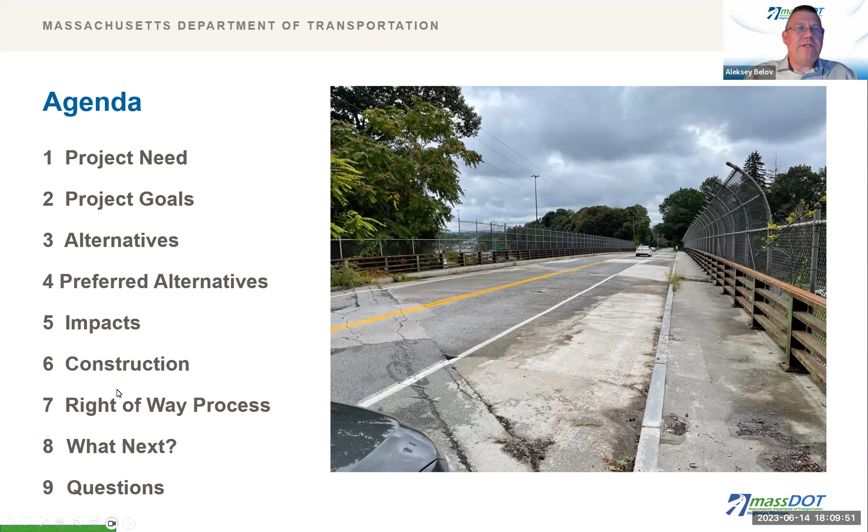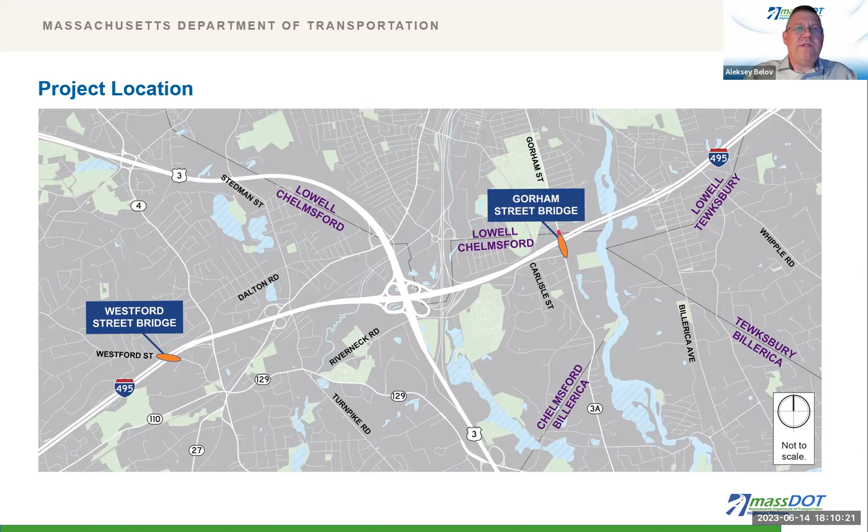As I indicated previously, these bridges will be replaced at the same time using the design-build method. Specifics about the design-build method will be provided later in the presentation.

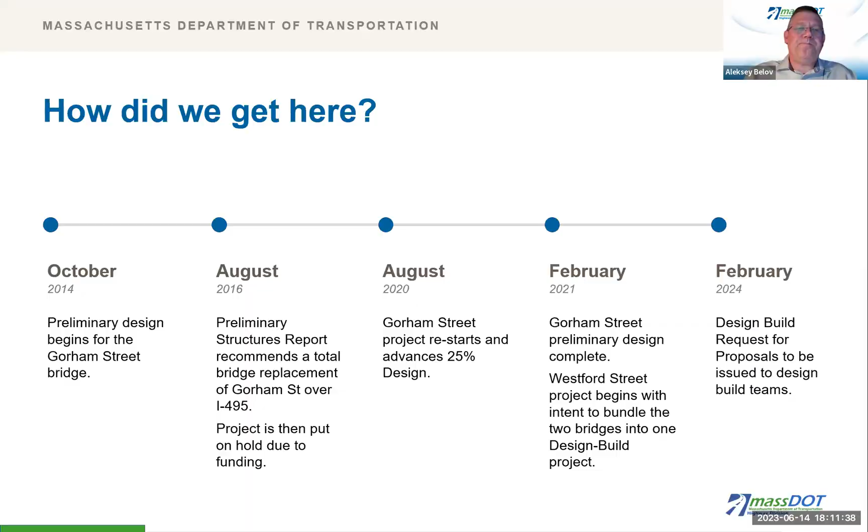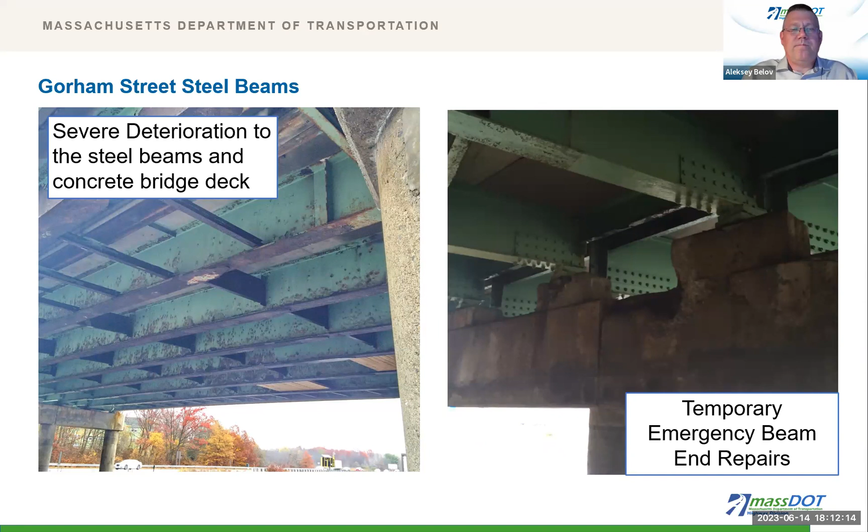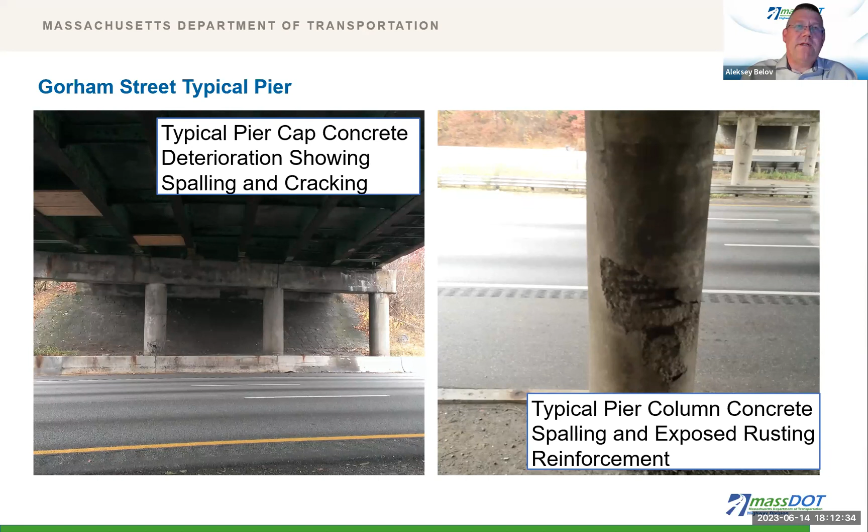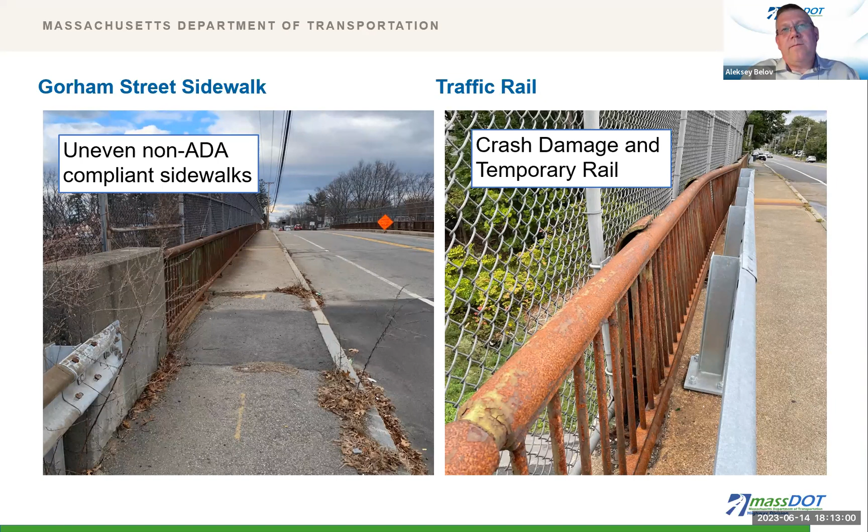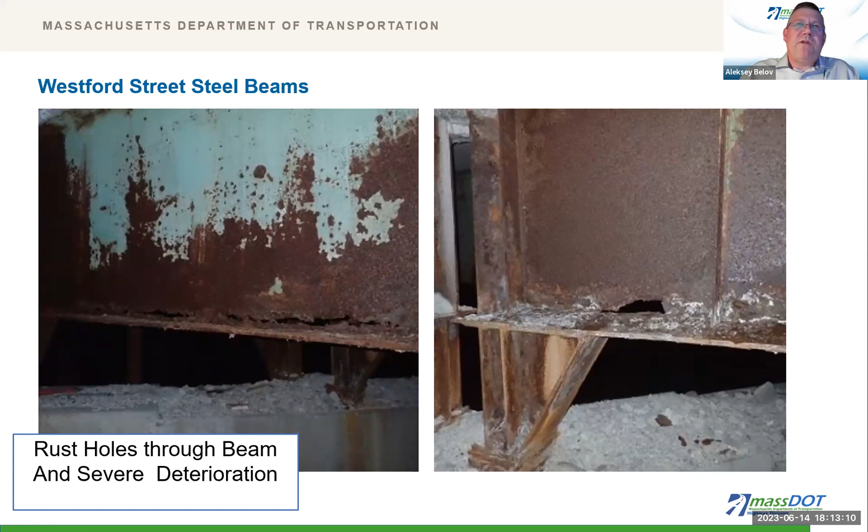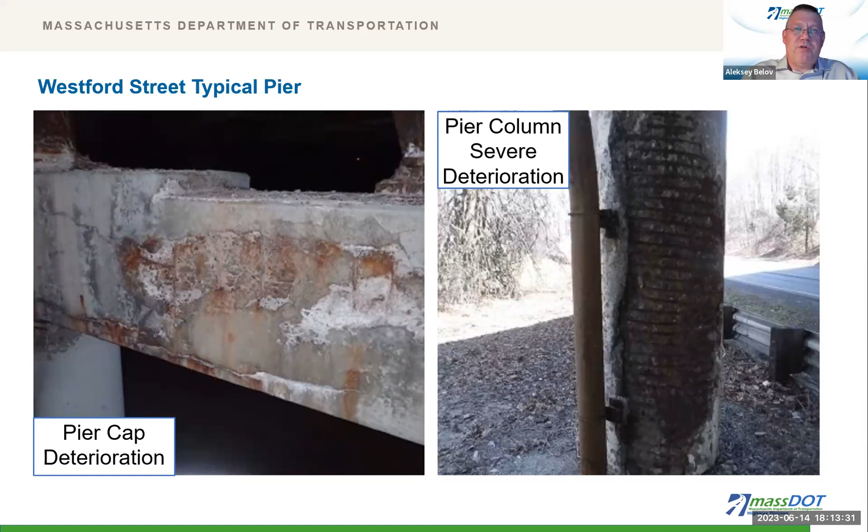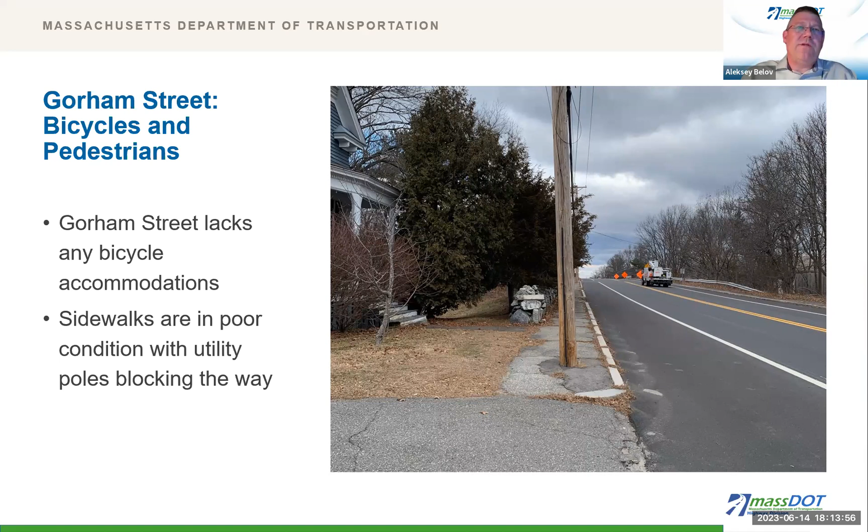Gorham Street has bicycles and pedestrians but lacks any bicycle accommodations. There is a wide pavement with wide lanes and shoulders, which lends itself to high vehicle speeds. The sidewalks leading to the bridge are in poor condition, with utility poles blocking the path in several locations.

Westford Street has similar issues. There are no bicycle accommodations on the roadway. There is only one sidewalk over the bridge, and it ends on either side without any accessible curb ramps. The other side only has a safety curb, which is like a very narrow sidewalk not meant for pedestrian access.

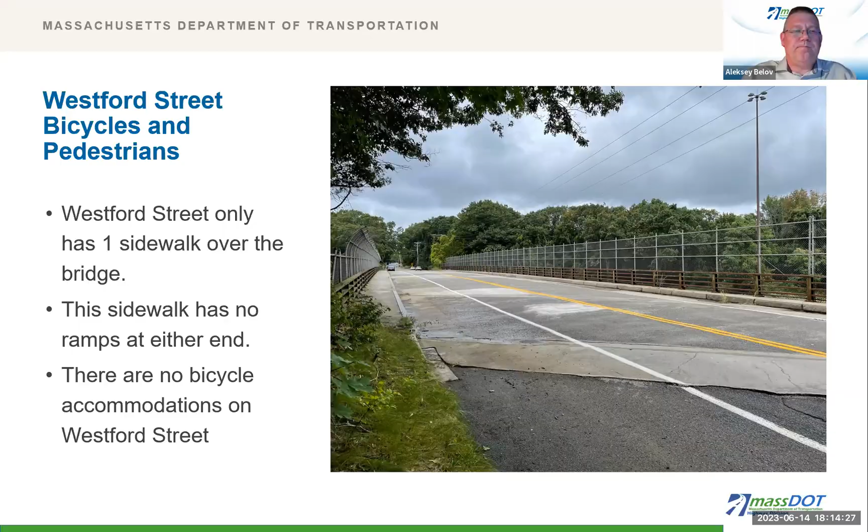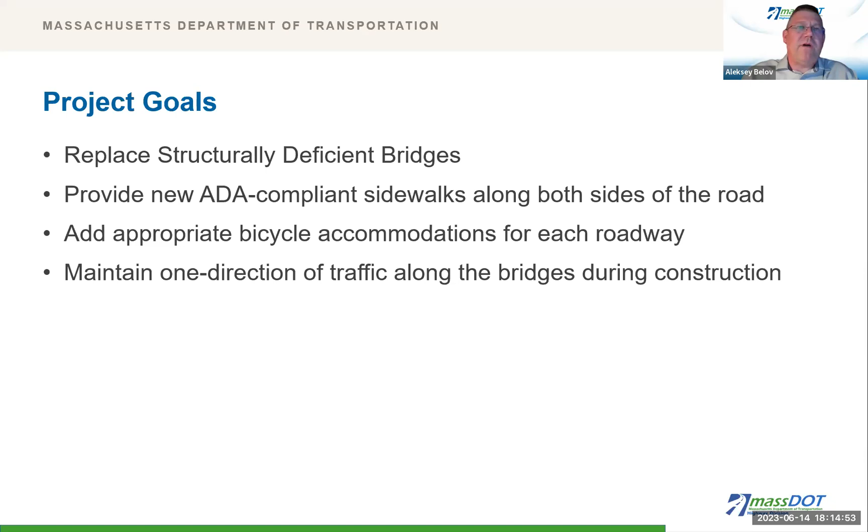What do we want to accomplish? Project goals are the following: replace the structurally deficient bridges, provide new ADA compliant sidewalks along both sides of the roadways, add appropriate bicycle accommodations for each roadway, and maintain one direction of traffic along the bridges during construction.

What alternatives were considered? The following alternatives were considered for both bridges: bridge deck replacement, superstructure replacement, and full bridge replacement. Full bridge replacement was the selected alternative.

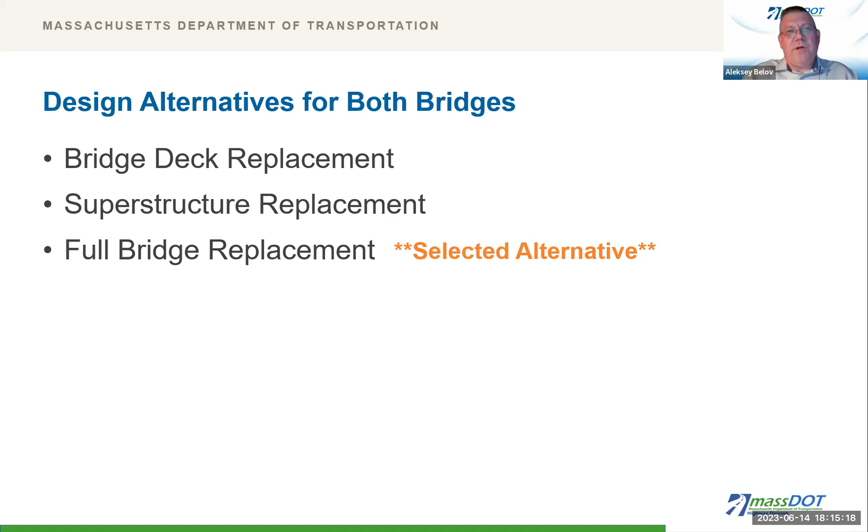What is in the preferred alternative? This is the plan view of the proposed design for Gorham Street, showing the southern project limits which extends just south of Riverneck Road. With the wide pavement width that exists today, we were able to propose a design that includes narrower travel lanes, 11-foot wide, and add buffered bike lanes.

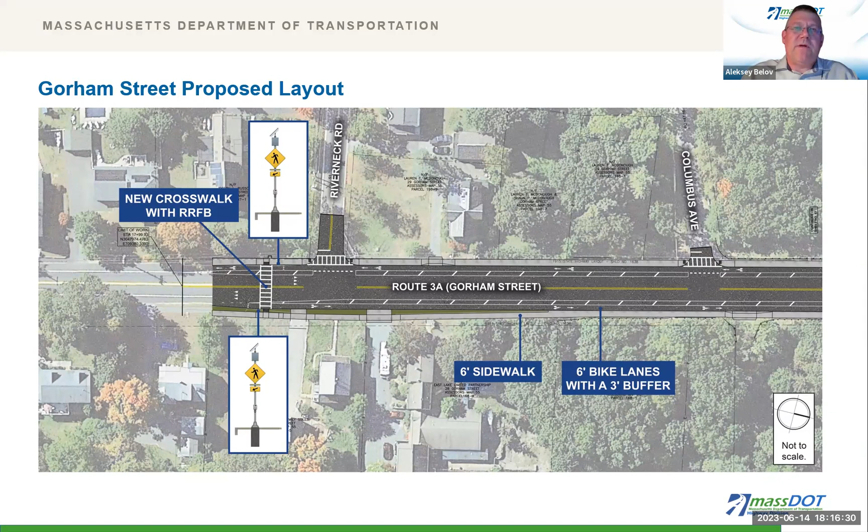These are 6-foot bike lanes with a 3-foot painted buffer. This will create a safer space for bicyclists traveling through the project limits. The sidewalks on both sides of the roadway will be reconstructed to new 6-foot sidewalks, and a new crosswalk is being proposed just south of Riverneck Road. This crossing will have a rapid rectangular flashing beacon to improve safety, and is being proposed here because there is a bus stop in this location.

This slide shows the rest of the project limits to the north, including the roadway over the bridge with the project extended to the Chelmsford Lowell line. The same cross-section is proposed for the entire project limits.

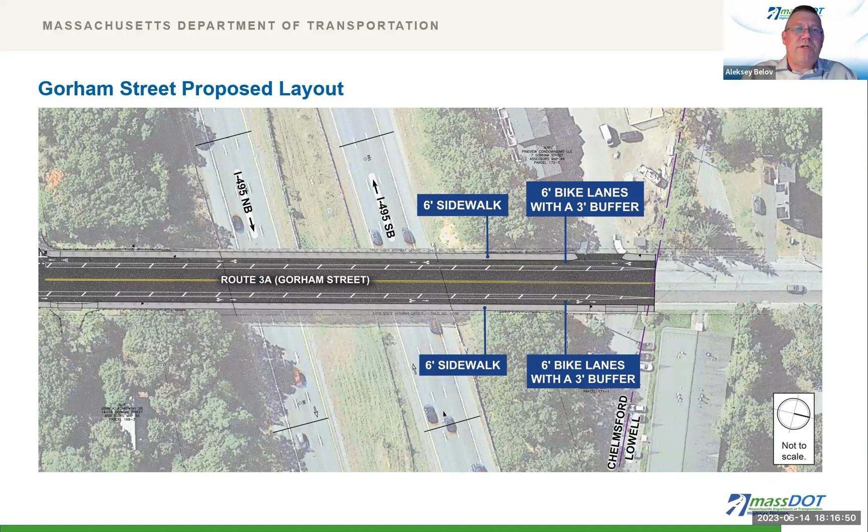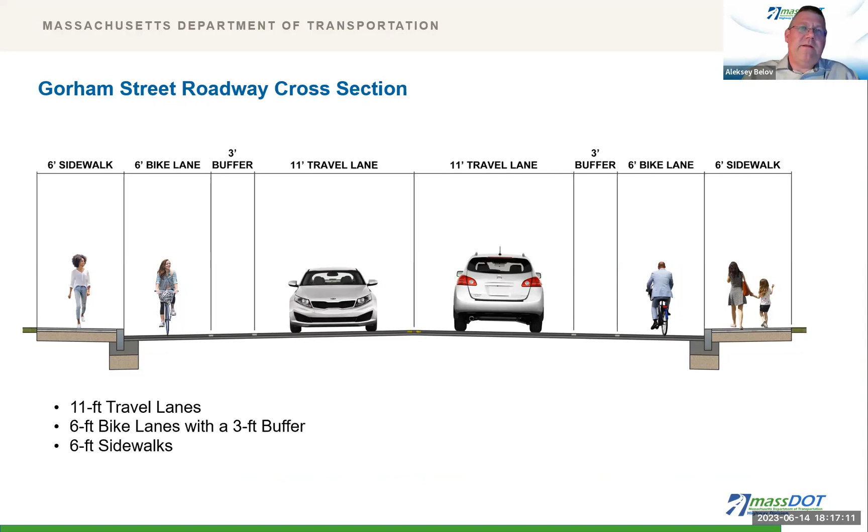This is a cross-section view of the proposed design for Gorham Street. You can see two 11-foot travel lanes, two 3-foot buffers, 6-foot bike lanes on each side, and 6-foot sidewalks on each side of the roadway.

There will be 6-foot sidewalks on both sides of the bridge with ADA accessible curb ramps. Another reason there are no buffered bike lanes proposed on Westford Street is because the project limits are not in the area considered to have a high potential for everyday biking, as determined by MassDOT's 2019 statewide bike plan.

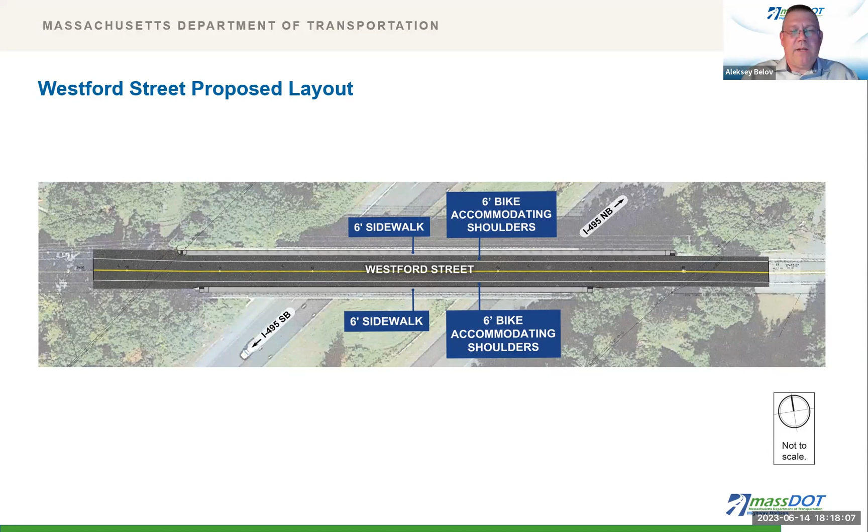This shows the proposed roadway cross-section for Westford Street. You can see two 11-foot travel lanes, two 6-foot shoulders, and two 6-foot sidewalks on either side of the roadway.

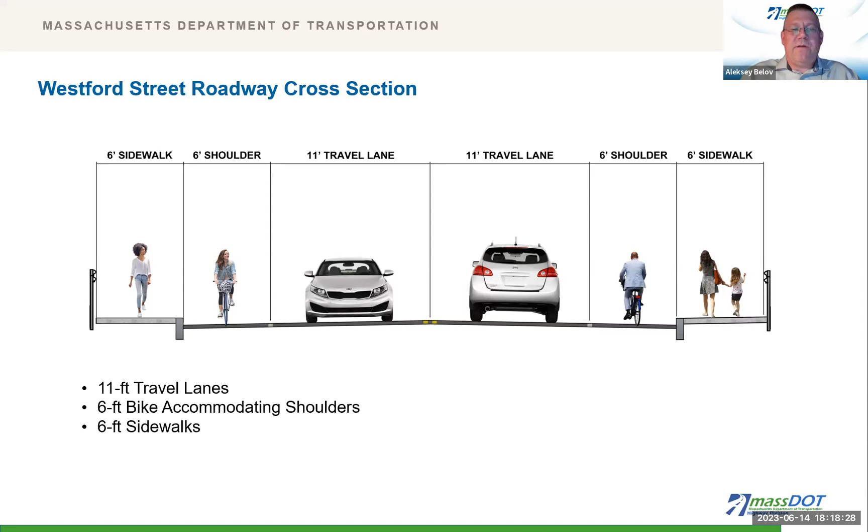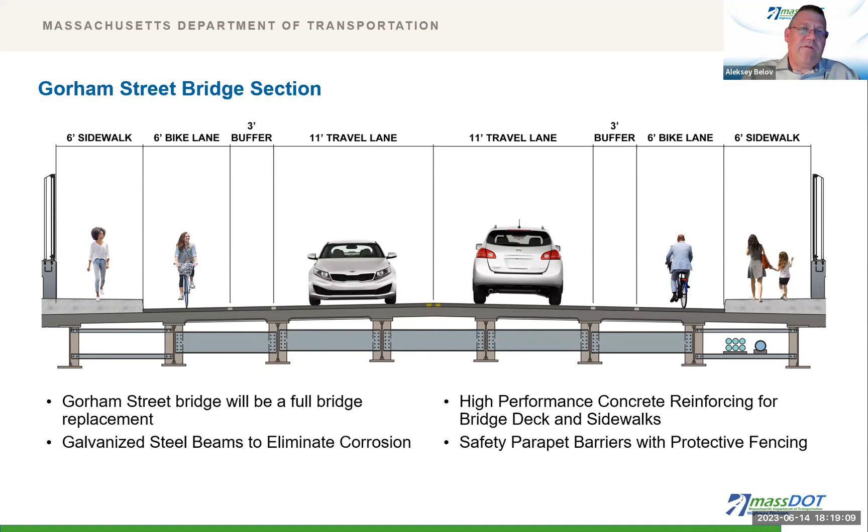Gorham Street Bridge will be a full bridge replacement with galvanized steel beams used to prevent corrosion, high-performance reinforced concrete for the bridge deck and sidewalks to increase durability. Safety parapet barriers with protective fencing will be constructed along each side of the bridge. The bridge section will match the approach roadway presented previously, with two 11-foot travel lanes, 6-foot bike lanes with 3-foot buffers, and two 6-foot sidewalks.

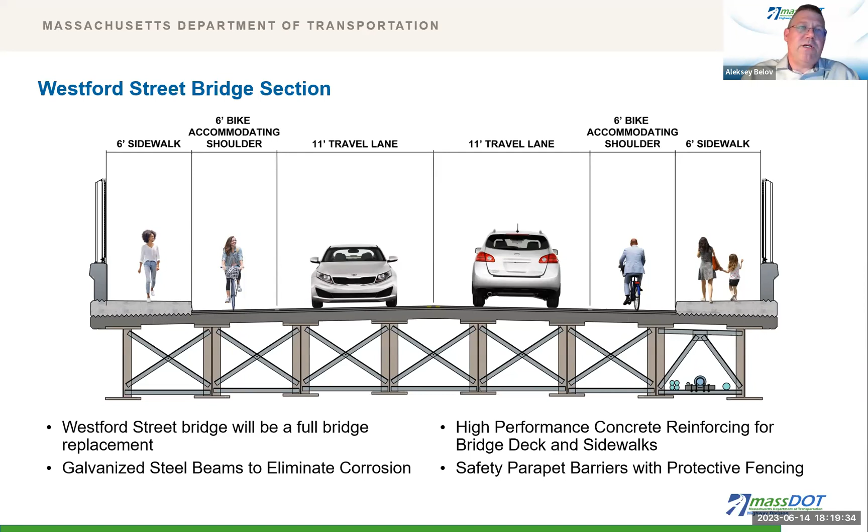Westford Street Bridge will also be a full bridge replacement with similar steel, concrete, and safety barrier features mentioned for the Gorham Street Bridge. The bridge section will also match the approach roadway with two 11-foot travel lanes, 6-foot shoulder/bike lanes, and two 6-foot sidewalks.

How will bicyclists and pedestrians be impacted? During construction, bicyclists can continue to ride with vehicles on the roadway as they do today. They will either remain on the bridge or follow the vehicle detour, depending on which direction they are traveling. We will go over the detour in more detail shortly.

Pedestrians will be provided with a sidewalk or protected path over both bridges at all times during construction. Following completion of construction, pedestrians and bicycles will be accommodated on both bridges.

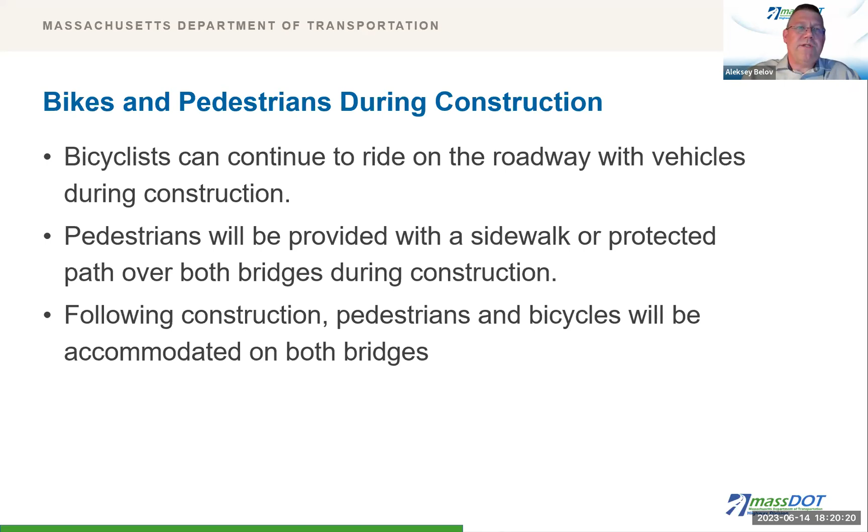What are the environmental, cultural, resource, and community impacts? There is no anticipated environmental impacts. We are not dealing with any wetlands areas within project limits, nor are we dealing with a bridge over water. Because the project is federally funded, we do need to follow the National Environmental Policy Act review, but we anticipate that all federal regulations will be cleared.

Because this is a bridge replacement project and there are no wetlands or waterways within the project limits, we are exempt from Chapter 91 review, MEPA review, and the Wetlands Protection Act review.

What is the construction approach? With the conventional approach to procuring bridge and highway projects, MassDOT has relied on the design bid build method. In this case, the designer works with MassDOT to complete the final design bid documents and fully describe the details of the project.

The design build method allows the contractor and designer to work together on all phases of the project to promote innovation, reduce project costs, and expedite project delivery. H&H and HSH will remain on the MassDOT review team throughout the final design and construction process.

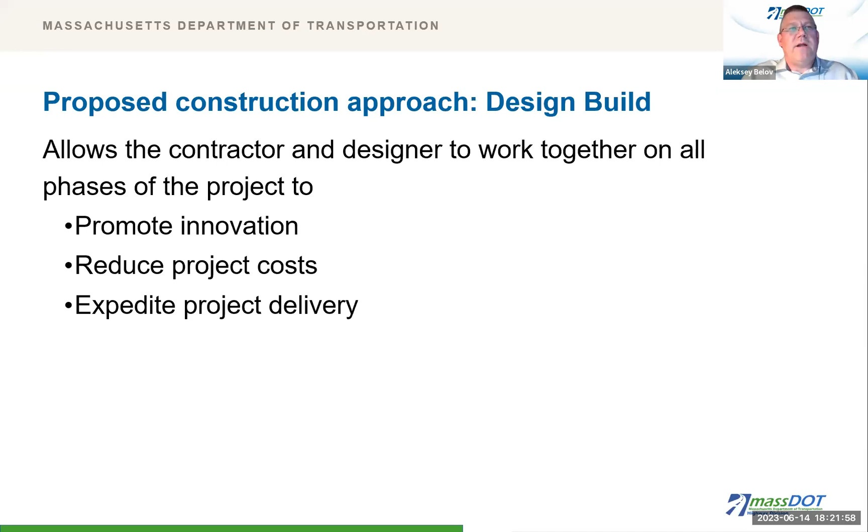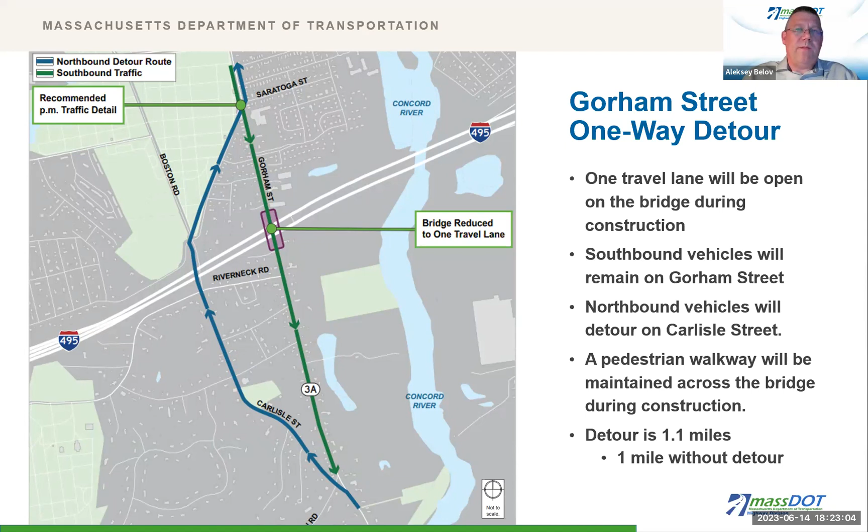And as mentioned previously, a pedestrian walkway will be maintained across the bridge during construction.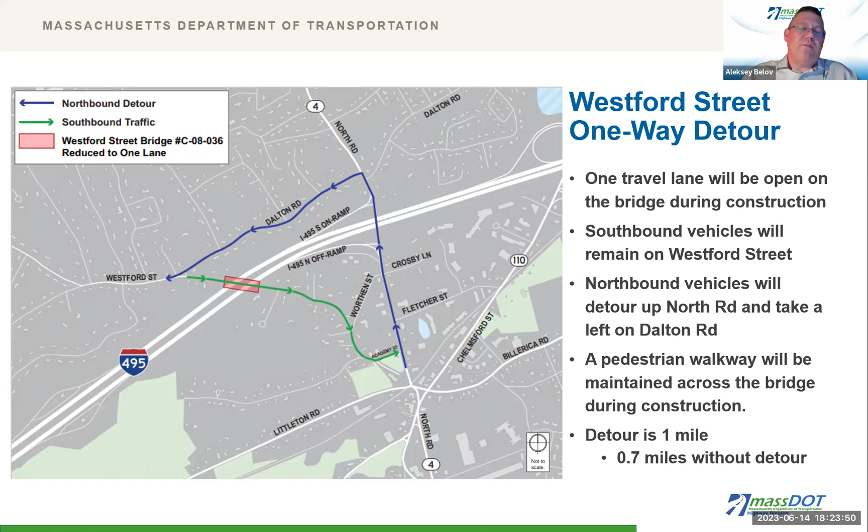Our next steps: First, finish preliminary design, projected to be completed in winter-spring 2024. Second, procure the design build team through a selection process by MassDOT, planned to be completed in spring/summer 2024. Next, start construction, planned to begin in summer/fall 2024. Concurrently with ongoing construction, develop and finish the final design, projected for mid-2025. The final step is to complete the project in a safe and efficient manner, projected for late 2026, maybe mid 2027.

How will your property be impacted? Chris Casanella from the State Right-of-Way section will now explain the process.

Thank you, Aleksey. Good evening, everyone. My name is Chris Casanello, and I represent the Right-of-Way Bureau at MassDOT. The Right-of-Way Bureau is responsible for acquiring all necessary rights in private and public land for the design, construction, and implementation of this project. Affected property owners will be contacted by personnel from the Right-of-Way Bureau or consultants representing MassDOT. The procedures used must comply with state and federal regulations governing the acquisition process. The proposed design plan includes right-of-way takings, including fee, permanent, and temporary easements, if they are warranted and needed. Affected property owners' rights are protected under Massachusetts general laws, primarily Chapter 79. If a project is receiving federal funds, the property owner's rights are further defined under Title III of the Real Property Acquisition Policies Act of 1970 as amended.

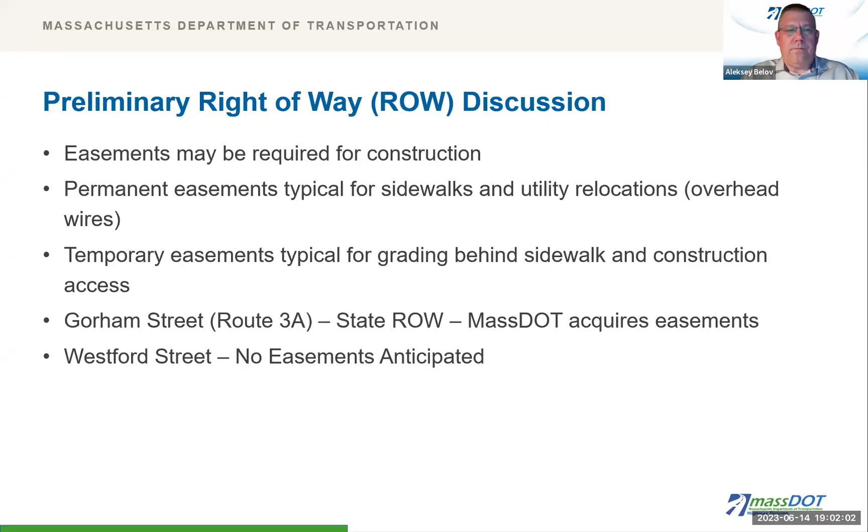I think that would be more of a question to ask, whether for what documents their traffic data is available. Not sure, I would have to look into this. Do you mean the traffic flow over the bridges, or traffic flow affected by the detours possibly?

Maybe we can give it a minute to see if that attendee wants to write up any clarification about what traffic flow data they're talking about.